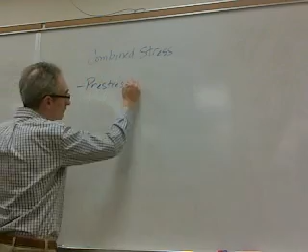So in the most basic sense, combined stress is going to consider techniques that we can use when we happen upon situations that have different types of stresses. And like I said, in the civil field, this occurs a lot. We have things like pre-stressed concrete beams. Okay? Now, I don't know how much you know about a pre-stressed concrete beam, but I'll sort of just graphically tell you how they work. Have you heard the term pre-stressed concrete before? Okay? Well, here's the way it works.

We can go out there in the field and we can build a building or a facility, and we can build that with concrete that is normally reinforced. That is, it's got the steel bars, they're tied together, we put formwork up, we arrange the steel bars in a certain manner, and then we pour the plastic concrete into the form, and the concrete hardens around all the steel. Okay? That's what they call conventional reinforced concrete or normally reinforced concrete.

A different aspect of that is to actually manufacture elements like beams in, I'll call it a factory. You might actually hear them talk about manufacturing these things in a yard or a casting plant. All right? What they'll do is they'll take formwork and whatnot, and maybe even some conventional reinforcing. But the big thing that they have is they actually have these steel tendons or steel cables that they place in the concrete forms. All right. Now these steel cables, some people might call them tendons. There's different types and whatnot.

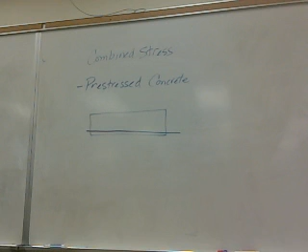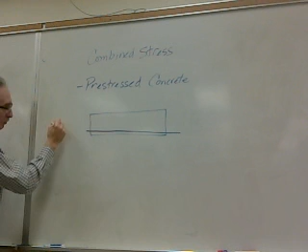Basically, what they are is they're made up of individual wires. So people might talk about a half-inch cable or a half-inch tendon, but it's not a solid steel cable. It's actually a series of usually 7 wires that are wrapped around, almost like a rope might be spun around. That's what they call a strand or a tendon, or some people might call that a cable.

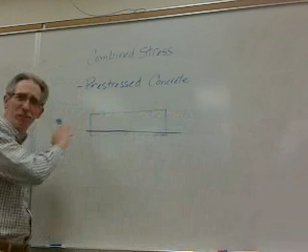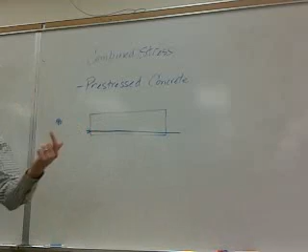So anyway, before they even get ready to pour the concrete, they set up their forms, okay, and usually this is based on having very repetitive types of members that they want to make, all right, and they string the cables or the tendons through there, and then they anchor them at the edges, the front and back of the forms, okay. They anchor it, and then they pull on this cable. Now this is before the concrete's even there, okay. They pull on this cable, and then they basically anchor it on the other end. So now this cable is in there and it's stretched really tight.

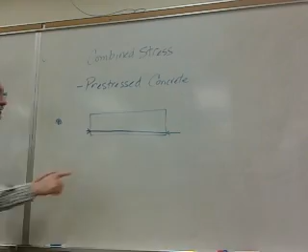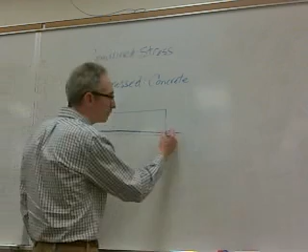Okay? Now they come in, they pour the beam, and they fill the forms with concrete. They wait till the concrete gains its strength. And then they go ahead and they take the forms off. They release these cables at the anchorage. What do the cables want to do? Cables want to snap back. But they can't snap back because they've got all this concrete in the way. Okay? So what kind of force does that put on this concrete element, this concrete beam?

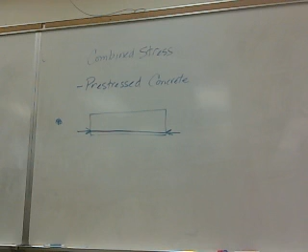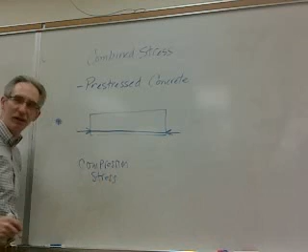Compression force. Okay? Well, you know how to calculate a compression stress, don't you? Well, how do you calculate a compression stress? What's the formula? P over A, right? Force over area. Okay? Well, so that's a pre-stressed concrete beam.

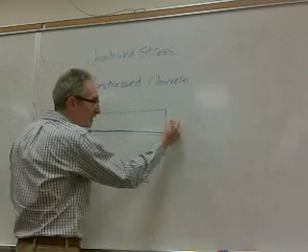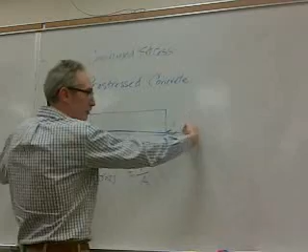Except, notice what I also did here, and this is typically what happens too. I didn't put the cable right at the middle of the concrete beam. I sort of put it down maybe towards the bottom a little bit. So not only is this going to put a compression force on it, but because it's not right at the centroid of the shape, if I was putting it right at the centroid, there'd just be a compression stress here. But now, since I put it down at the bottom, what's it going to do to the beam too? It wants to bend it.

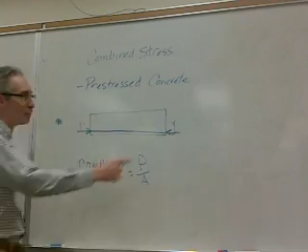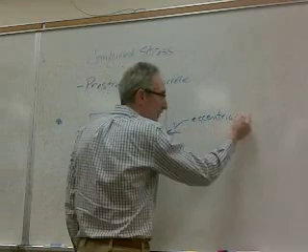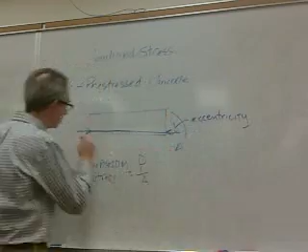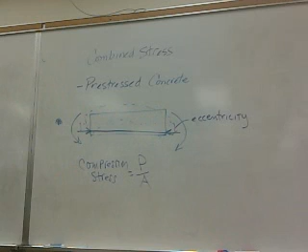That's right. There's a moment created here because of this force and this distance. We call this distance an eccentricity, an eccentric distance, an offset distance, a distance that occurs because we're not loading it right at the centroid. But you're absolutely right. This puts a bending moment on it. It wants to twist it. So the beam actually wants to flex up in the air like this, and it's just been released from the form. So you said, hey, we got a bending stress on it too.

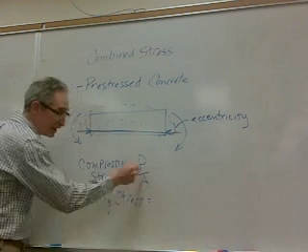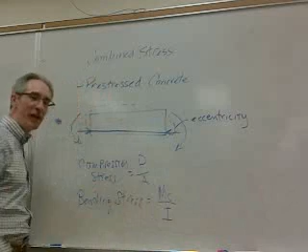Well, my question to you would be, do you have a bending stress on it at the same time that you have the compression stress on it? The answer is yes. So what does that mean? Well, it means that these two effects are combining with each other. And that's what we want to learn about a situation like this. How do these combine together so that we know what the maximum stress is, or what the stress is at the top side of the beam or the bottom side of the beam, and things of that nature.

Okay? Now, let's go to a practical question. Why do this? This seems like a lot of work. Wouldn't it just be better to go out in the field and put your normal reinforcing in a form and go ahead and do this? I mean, why do this? You got to ship these to the site, blah, blah, blah. Why do it this way?

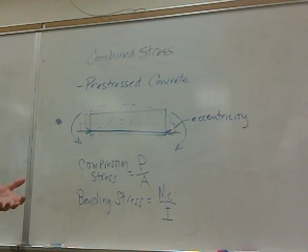What do you mean weather? They're expecting a lot of rain or it's snowing and they're putting up a structure, concrete drying. Okay. Well, yeah, the yard, the place that they manufacture these, usually this would be done outside too, right. But it could be done in a big open shed type building or whatever. If nothing else, it's more controlled than project conditions. If you had to make 12 of these, you should be able to make all 12 relatively the same, right? So it's much more controlled.

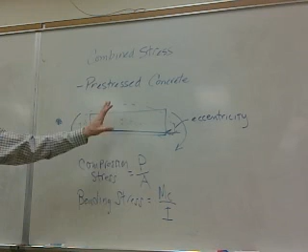The other thing that you're sort of coming up with when you start talking about the project is I don't have to wait to install these once they're ready in the factory. I can ship them to the project and they're ready to be installed, right? What about that concrete that you pour on site? When is it finally ready? Well, it probably takes 28 days, more or less, to gain its full design strength. So the installation, the construction process, could be much faster. Okay? But there's one more thing.

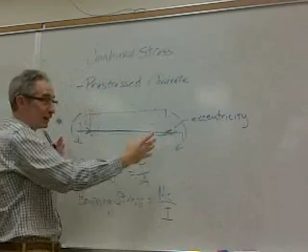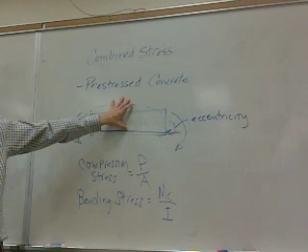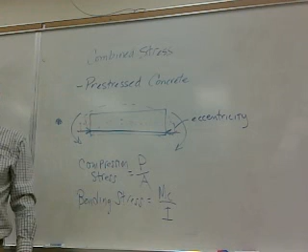If I put pre-stresses in here, I said it sort of flexes this up in the air, that means I'm putting stresses in it to do it. Well, if these stresses are sort of opposite in nature of what's going to be there after this is loaded, then I can make this a smaller member. So that normally reinforced concrete beam maybe had to be 20 by 40. But maybe this pre-stressed beam can be 15 by 30.

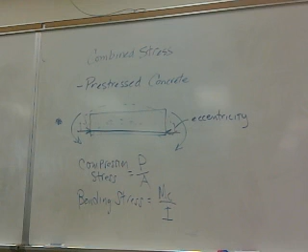Okay? Now you might say, well, that doesn't sound like a lot, but I'll tell you what, if you're building a parking garage or a building, headroom height is everything. So if you can shave 10 inches from floor to floor off headroom height and clearance height in a parking garage or whatever, that's a big deal. So anyway, that's just an example of where you're likely to see combined stress.